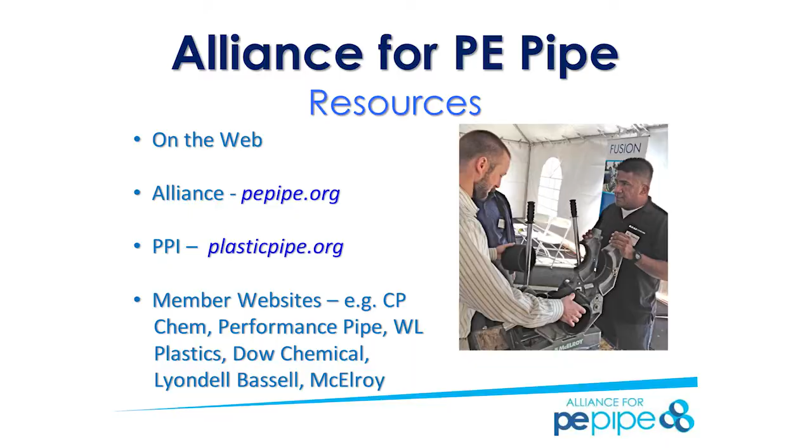Now the standards for polyethylene pipe are well established. You can rest assured that AWWA, ASTM, the CSA, and the NSF are all paying attention to polyethylene pipe.

And our products are manufactured to the specifications of those organizations. I mentioned PPI before, the Plastic Pipe Institute. They published a tremendous book, a handbook, if you will, on polyethylene. Many of the questions that I get, that I respond to, I get the answers out of that book. Now, I wouldn't exactly say it's bedtime reading, but it really is a great resource.

And oftentimes when I respond to a question, I'll include a chapter from that book, a single PDF chapter, going to the questioner for backup on our response. I'll also say you can get that book at PPI's website, plasticpipe.org. It's about $50 sent to you. Or if you send me an inquiry, I will send you a roughly 15 meg PDF of the entire book, free of charge.

So the question, why use poly? Why should I even consider it? We're pretty happy doing what we're doing. Yeah, we've got a few breaks, but why should I even consider polyethylene? Well, here are 5 really good reasons to consider using polyethylene. It doesn't leak. It doesn't corrode. It doesn't care about caustic soil. You don't really have to maintain it. And, oh, by the way, it's pretty tough, ductile, and flexible.

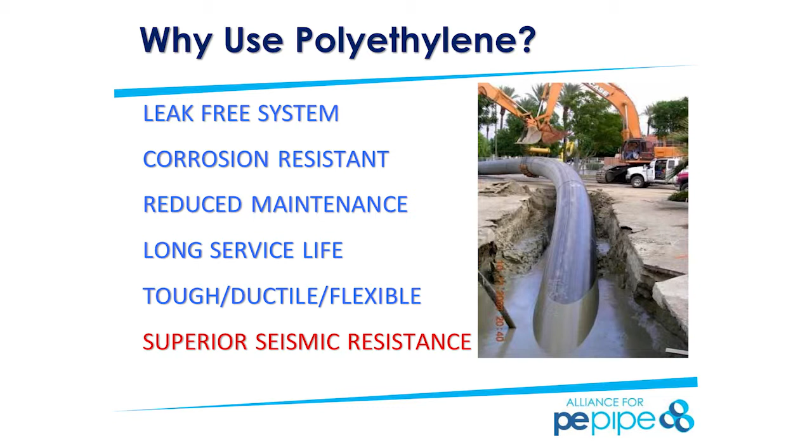But I'm going to talk about the superior seismic resistance of polyethylene pipe. Why seismic? Why, I don't have earthquakes? Well, I'll tell you, if our pipe can handle seismic issues, significant ground ruptures, it can handle whatever you can throw at it in your municipality. It can handle the freeze-thaw. It can handle soil constriction. It can handle construction methods and techniques that impact underground pipelines. If it can handle earthquakes, it can handle anything your municipality can throw at it. And now I'm going to prove that to you.

So, the Water Research Foundation. Many of you perhaps are members of the WRF, located in Denver. They have about a $6 million a year budget devoted to research of all things pipelines, not just poly. Poly is a very small part of what they do. But they did a study that was specifically done by a guy named John Eidinger and Craig Davis in California. Eidinger and Davis sent crews to the 3 largest earthquake events that occurred in the world in 2010 and 2011. And they sent them multiple times.

This is available on the web at WRF's website, waterrf.org. It's their report number 4408. You can Google that number and get it, or I can send it to you. We had nothing to do with the report. We didn't fund it, nor did we participate in the research. So Eidinger and Davis sent crews to Christchurch, New Zealand, Concepcion, Chile, as well as Sendai, Japan, on multiple occasions, and learned a lot of things.

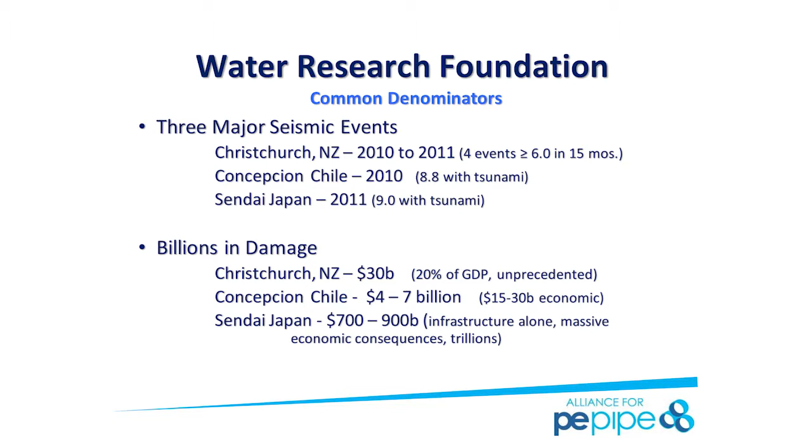There were several common denominators of all 3 of these earthquakes, other than they killed a lot of people. There was a lot of monetary damage, significant impacts to economies as a result of these earthquakes. In Christchurch, New Zealand's case, there's a $30 billion hit to their economy. Concepcion, Chile, up to $7 billion. And then, of course, in Japan, which most of us are familiar with, it was up to $1 trillion in damage in that country alone. In the case of Christchurch, 185 people died, 525 died in Chile, and over 15,000 died in Japan.

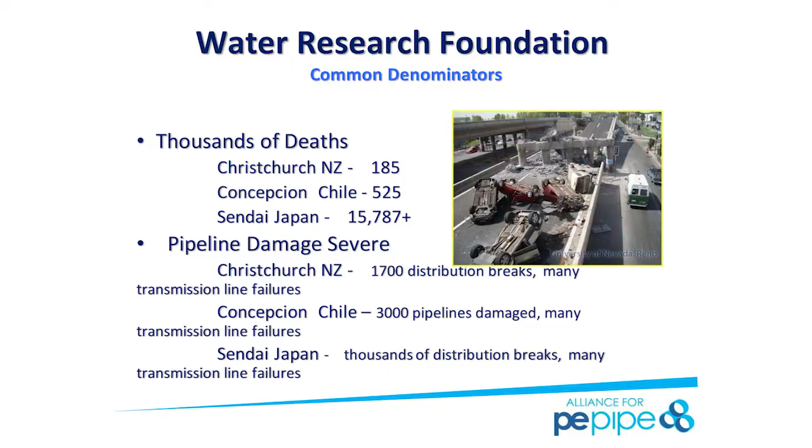The number of breaks on the screen is significant in each of those 3 locations, on the water and the sewer side. And even with these thousands of deaths and billions in damage and the severe pipe damage throughout all these locations, guess what? No reported polyethylene failures in water, sewer, or gas. That's in the report. No failures of polyethylene. If polyethylene can handle the 3 biggest earthquakes in 2010 and 2011, it can handle whatever's going to go on underground in your community. You should give polyethylene a try.

So specifically, the Tohoku quake in Japan, what happened there? Well, it was a 9.0 earthquake with an ensuing tsunami. The shaking lasted up to 5 minutes in some locations.

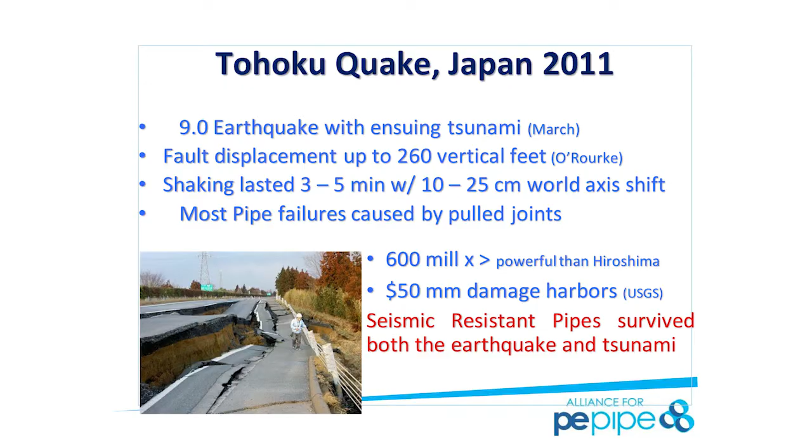And most of the failures were caused by pulled joints. The phrase that struck me when I read this report was seismically resistant. Eidinger and Davis said polyethylene pipe is a seismically resistant pipe. They recommended people seriously consider polyethylene pipe as a result.

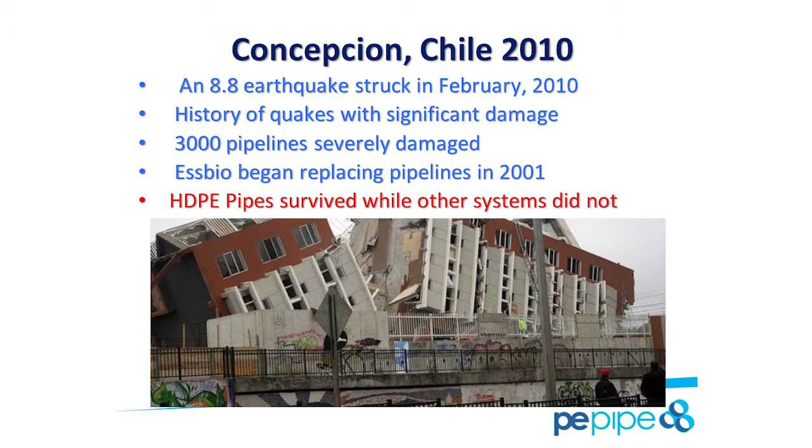We all know how much time and energy we spend fixing broken bell and spigot systems. Why, when there's something better that's available? In the case of Concepcion, the thing that I find fascinating here is we have Essbio, a private for-profit water company that came in prior to an earthquake in 2001 and started making all the fixes with polyethylene. All those fixes that they made in that 2001 quake survived beautifully in the 2010 quake.

No reported failures. So now we have Essbio, a private for-profit water company, saying, hey, not only did polyethylene survive in 2010, all those pipes, the 10 years' worth of pipes that we put in as part of our capital program also survived. That's exciting. And that's proof. That's objective data that says polyethylene pipe can handle seismic issues well, without failure.

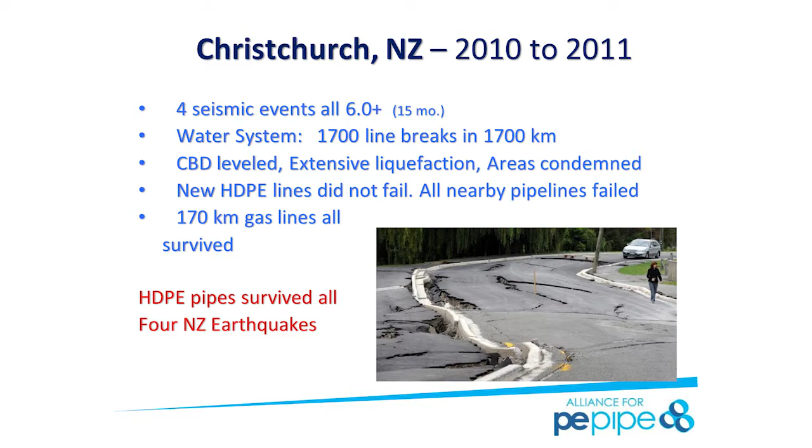Without failure. So in Christchurch, four 6.0 earthquakes and greater over a 15-month period in one municipality. Four of them. The one in Napa in August of 2014 was a 6.0. Imagine that four times over 15 months. So they had over 1,700 line breaks. After the first earthquake, the mayor of New Zealand called up Dr. Tom O'Rourke at Cornell, and said, hey, we had a bunch of breaks, what should we do?

O'Rourke said, have you considered polyethylene? And the mayor said, nah, we use it for gas, but we don't use it for sewer and water. A familiar refrain in the United States, to be sure. So O'Rourke said, please consider it for water. Take a 1.5 mile section, fix it with polyethylene and see how you like it. Try it in the water side.

So the mayor did. Little did the mayor know, earthquakes 2, 3, and 4 were going to come along, and that 1.5 mile test section did just fine. No breaks, no damage to it or the gas that was already in the ground. So the mayor of Christchurch, New Zealand was sold on polyethylene pipe. All the fixes after 2, 3, and 4 were done with PE pipe.

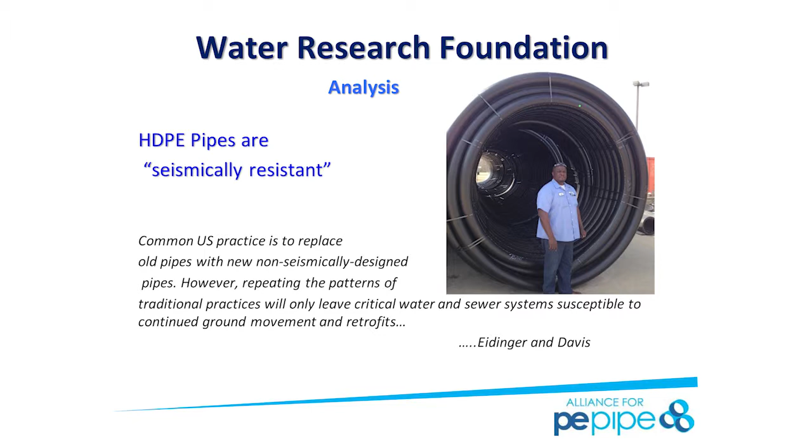So, seismically resistant is now in the lexicon of the engineering community in the United States. Or if I have anything to say about it, it will be. But it's an important phrase. And if we can take a 500-foot section of 6-inch polyethylene pipe and roll it up like that image you see on the screen, it can handle an earthquake event. It can handle what you can throw at it in your municipality. So freeze-thaw, no problem. Don't worry about breaks in the middle of the night.

Let's take a look at Thomas O'Rourke at Cornell. Why did the mayor of New Zealand call him after that big event in 2010? Well, O'Rourke had done a study in 2007, which he called his buried pipeline study, that basically was a ground rupture study of the effects on underground pipelines of a simulated earthquake event. You can find his information on his website at the university.

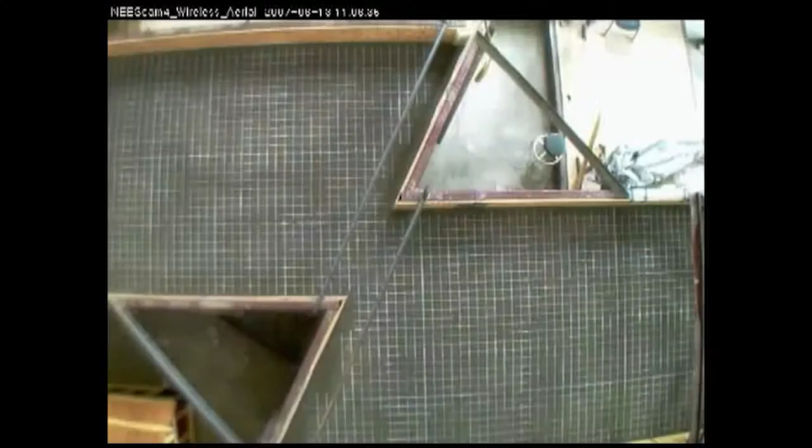So what he did is he took a 50-foot trench box, filled it full of dirt, and put a 35-foot stick of polyethylene pipe in there. Now that was a 16-inch diameter DR11 pipe. This video is the top view of what occurred with O'Rourke's study. That 4-foot shift, that lateral shift of the polyethylene pipe. Not only did he take a video of the top-down view, he also stuck a camera in the middle of that pipe so we can see what happens. Let's take a look.

That's what it looks like inside a 16-inch DR11, so pretty thick wall, stick of polyethylene pipe. Pretty impressive. So as O'Rourke says, the experimental evidence confirms HDPE pipelines accommodate severe deformation associated with earthquake-induced ground rupture. That's right out of the Cornell report.

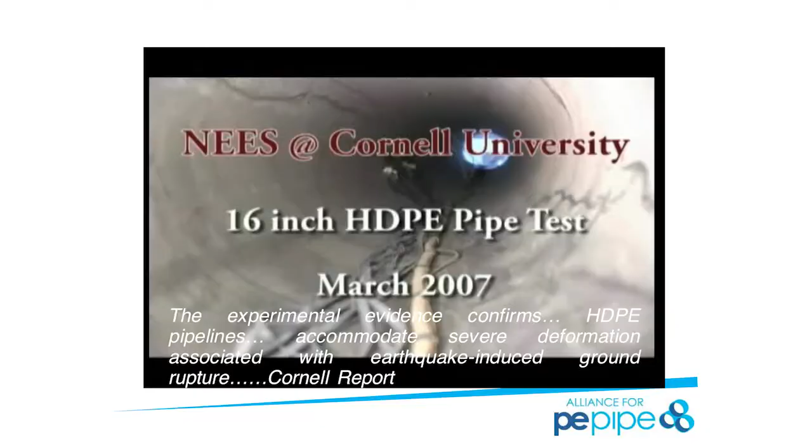So that means the two male ends of polyethylene pipe fused together can handle significant ground deformation. That means fused PE pipe can handle freeze-thaw in Grand Rapids, in Chicago, soil contraction in Houston, and earthquake events in Seattle, Los Angeles, and Napa, California. So why not use a pipe that doesn't break?

So the cost of water, it's very expensive. You do a lot to deliver water to your customers. Why should it leak? Polyethylene doesn't leak. We respect the value of water with polyethylene. We think you should too.

So today, I have the pleasure of introducing Richard Kolassa. Richard is the technical director of WL Plastics. He's an expert in all things poly. So he will share with us the features and benefits of polyethylene pipe.

Today, I'm here to talk about high-density polyethylene and the features and benefits and how it can work in your municipal water and sewer markets. Today, I'll be talking about the corrosion resistance of polyethylene pipe, the advantages of being a leak-free system, the benefits of reduced maintenance costs for today and future generations, service life of the product itself, and understanding how it can benefit your current municipality and water systems.

I'm also going to talk about the flexibility and how tough this product really is. The reality is with polyethylene pipe, we have a product that we believe will help eliminate a lot of the issues of an aging infrastructure that is currently a big problem not only in North America, but in all parts of the world. I'll also talk about the pressure rating of a product so you understand how these products can operate and how you can design them specifically for your applications in water and sewer.

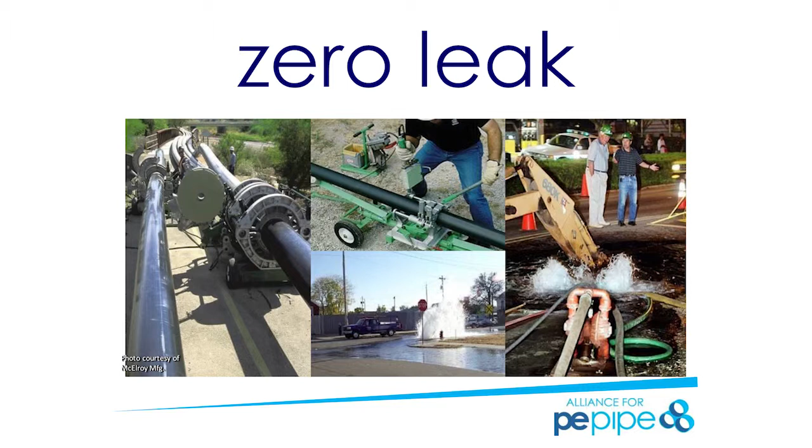I'll also talk about the leak-free system that polyethylene offers in your water and sewer applications. A zero-leak system means that the water that you're pumping into the pipeline after treating the system to very strict regulations and conditions is not going to be affected by infiltration or exfiltration. The corrosion-free aspects of polyethylene mean a long service life. It does not corrode and it does not tuberculate. So your system is going to operate as it would the first day that you designed it and started it.

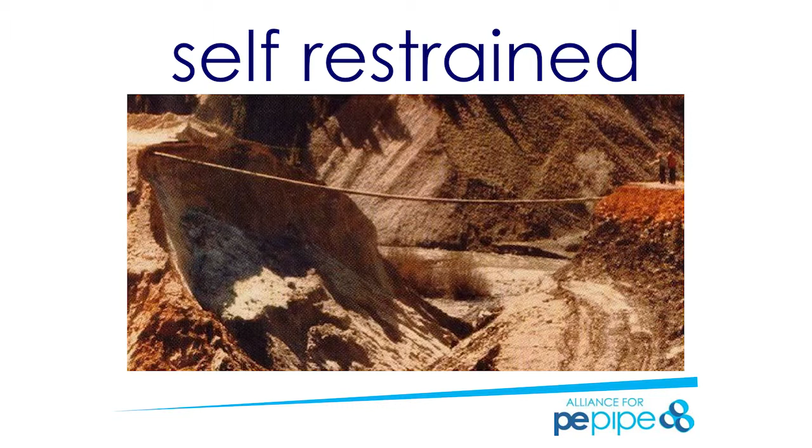It's a self-restraint product: when you fuse the product together, it holds together, and you don't have to worry about restraining the product in the ground. It will do that on its own. This particular picture shows a washout where the pipe actually held together. So your service lines are still providing, whether they're fire main or water supply, into those areas. That self-restraint system, leak-free and corrosion resistance really do mean extended life.

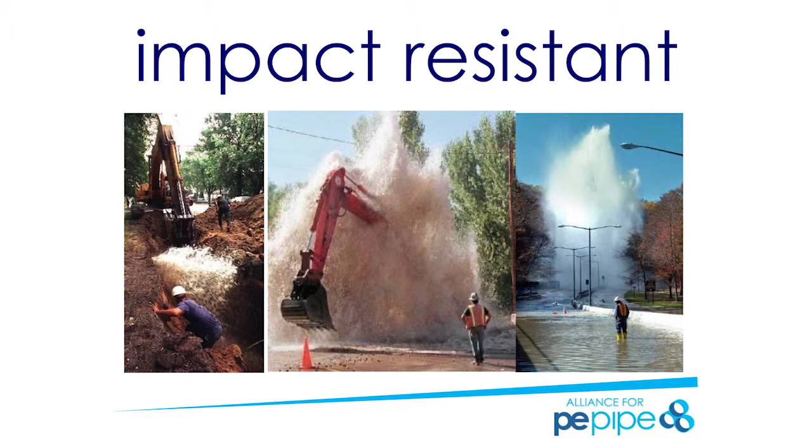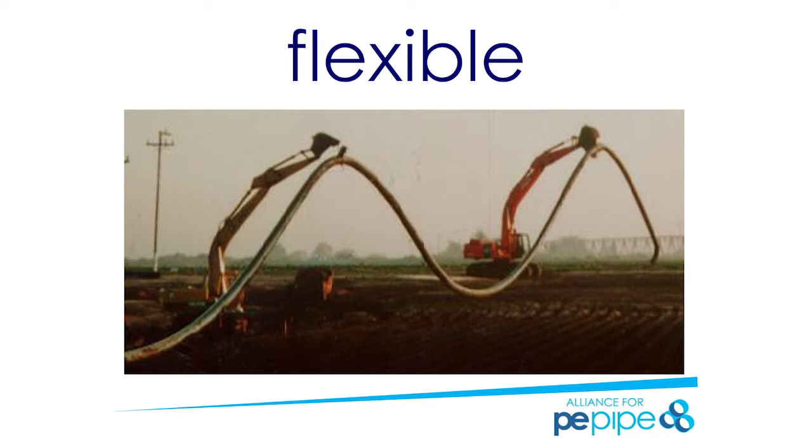It is very impact resistant. We have equipment that can damage pipe by third party, which is typically the failure mechanism for polyethylene pipe, which doesn't happen very often. But this impact resistance means it's very tough. It is also a very flexible product. Although polyethylene pipe seems a stiff product, it is ductile. And this flexibility helps you not only in installation, but gives you versatility in how you can stage and prepare to install polyethylene in your municipalities, especially in urban areas.

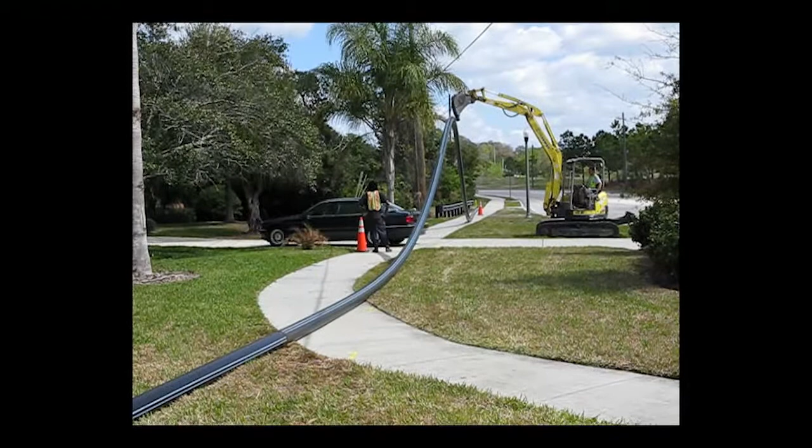As you can see in this video, polyethylene is very flexible. Apparently this gentleman didn't get the memo that we were installing pipelines today, so we had to lift the pipe so he could drive his car to attend to his daily business.

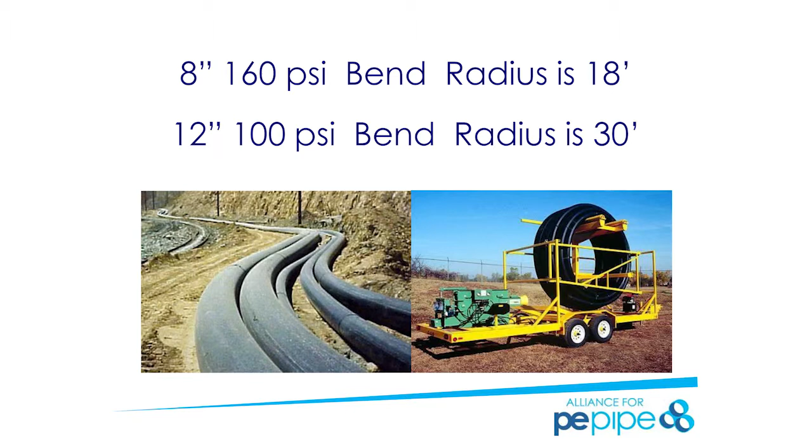The flexibility also is very well understood in the polyethylene industry. We understand that for various products we have minimum bend radiuses that we need to follow. In some cases, the installations will not require fittings to change the direction of the pipe. In this picture you can see it's actually bending and following the contours of the land, which helps reduce the installation times and gives you flexibility, no pun intended, to install quicker and more efficiently.

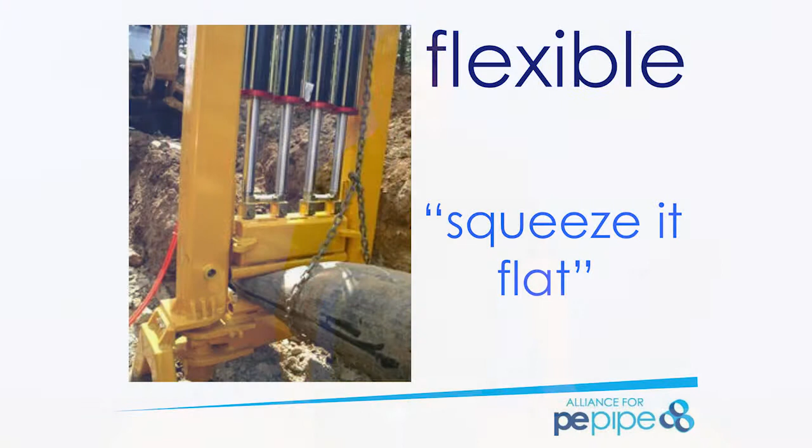The flexibility also applies to your maintenance and installations. This squeeze-off tool, because of the ductility of polyethylene, allows you to cut off the water sources so that you can utilize the fusibility of the product. That fusibility, maintaining a leak-free system, also adds to a monolithic system, which again adds to that leak-free confidence. This picture also depicts the squeeze-off of polyethylene. Again, this is a controlled procedure used in maintenance or in tapping into systems to allow for a contamination-free fusion of that system.

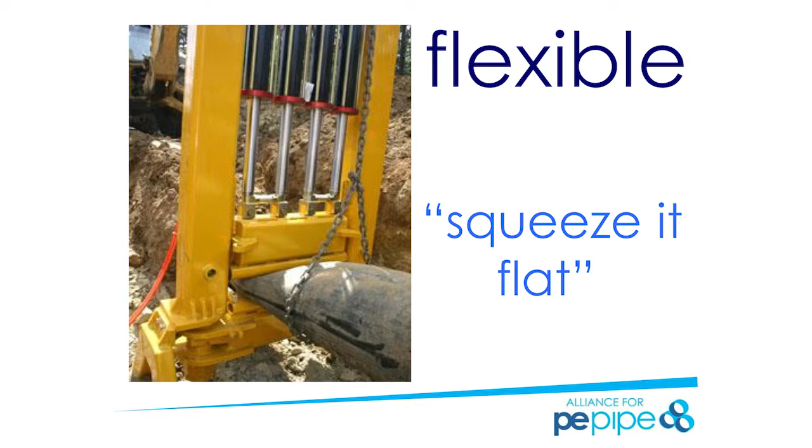Again, creating a leak-free environment for that pipe. The pipe is flexible enough that it can be squeezed down to cut off the water source so you're able to fuse to maintain that monolithic system, but it'll also go back to its original shape as long as yield points are not exceeded. And these procedures have been studied and tested to ensure your system maintains leak-free and it maintains the ability of the product to perform as expected.

Another feature of high-density polyethylene pipe is understanding the flow rate of polyethylene, especially water systems and sewer systems, and how that's designed into your flow characteristics and needs for that product and that pipeline system. The Hazen-Williams factor is a factor that is used for all different types of piping systems. For polyethylene, the value is 150. And this is really a benefit because it's one of the highest flow factors of all piping systems in the industry. And this accounts for how you properly design and ensure that you're providing the proper water flow to the communities that you're servicing.

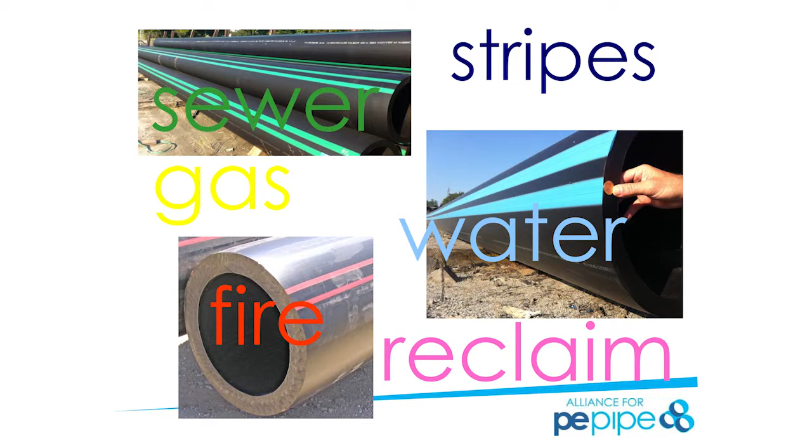Polyethylene can be identified in many different ways. First of all, print lines will identify what that product is for. However, as a quick reference on the beginning of an excavation, striping can be put on the pipe to identify water lines, gas lines, which is typically your yellow color, and your reclaim lines, which could be green or purple in some cases. There's also FM, which is Factory Mutual for fire prevention systems, that is identified by red.

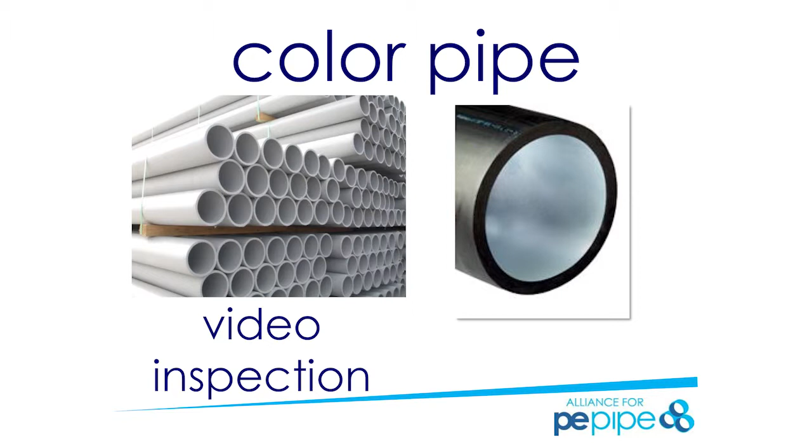Another feature and benefit of polyethylene pipe is it can be colored to many different types of colors. However, these colors are controlled in terms of the formulation, but to meet the needs, for example, for video inspection, we can lighten the color, whether it's the inside surface or the total pipe wall, to ensure that we have good, accurate video inspection of your pipeline system or your existing pipeline or installed pipeline system.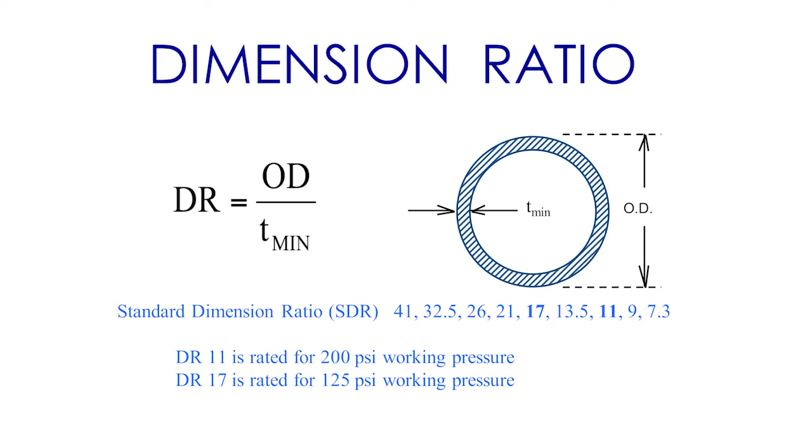Polyethylene pipe is designed by dimension ratio. Dimension ratio is a formula that is the outside diameter of the pipe divided by the thickness of the product. What does this mean? Well, for polyethylene pipe, we have various dimension ratios for varying pressure needs. These pressure needs are really important in the design of your pipeline system. If your operating system is based on 100 psi for the lifetime of that system, then you want to design that pipeline system based on the proper DR.

Why is that a feature and benefit? The fact is, we sell polyethylene pipe by the pound. We also purchase the polyethylene raw materials by the pound. And this will add cost benefit to you if you use and utilize the proper design factor. If you put in a heavier wall pipe for a lesser designed system, you're over-engineering that system. And that over-engineering will only cost you money. So we encourage you to understand the DR because it will help you properly design.

So with the understanding of dimension ratio for polyethylene pipe, we also have to understand how did that become where it is today. Well, what's changed is the resin itself, the materials and the products that we use to produce polyethylene pipe. We've moved from a PE 3408 material, which is a cell classification of the older generations of resins, to now PE 4710. So what does that mean to us? And what does that mean to you?

Well, for us, that means we can produce a thinner wall pipe and maintain the same type of pressure, which actually is a reduced cost benefit to you as the user of that polyethylene pipe system. In this particular slide, you can see the DRs and the comparisons between the pressures, which gives you that advantage. PE 3408 materials are no longer available for us to produce into polyethylene pipe, so you set your specifications and your designs around the PE 4710s.

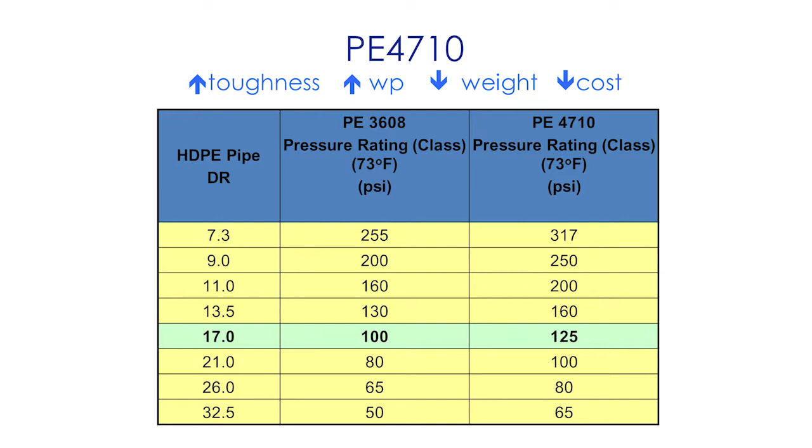Other features and benefits of polyethylene pipe are really the corrosion and the tuberculation of those products. Polyethylene pipe does not support any biological growth for the lifetime of that pipe. As you can see in this slide, steel pipe will corrode, it will build up biological aspects which causes problems within your piping system. Tuberculation narrows the ID of that flow channel, plus you're taking a very well treated water and pumping it into this dirty system.

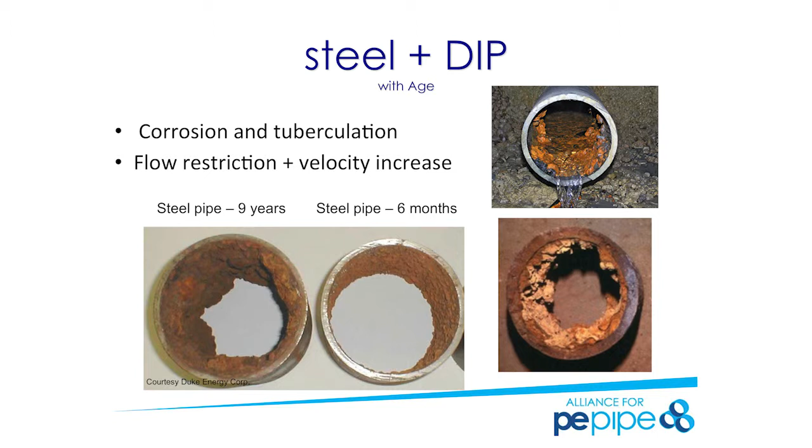Polyethylene resists that type of growth, and the flow velocities and flowability of the water inside that pipeline system will not change. This is very advantageous for the longevity of the product. If we end up corroding and plugging up the systems, it's going to affect how your maintenance and how your pumping systems will work. As you can see in this slide, we exhumed pipe that was over 41 years old.

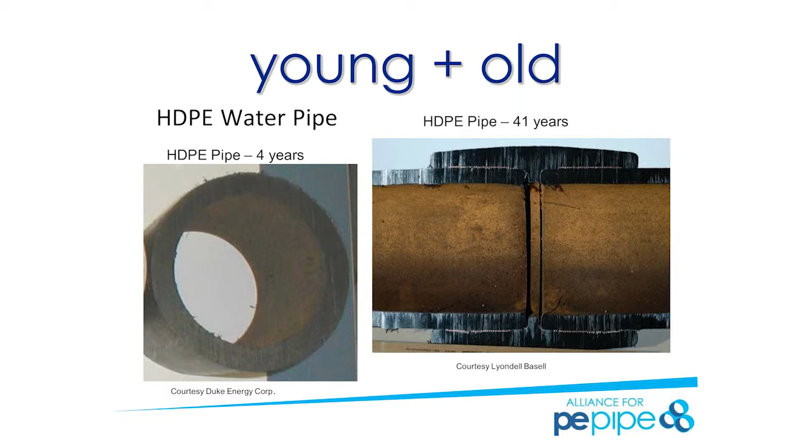And that 41-year-old system was as good as the day we put it in. We put it through all the rigors of testing, and it actually fell into the same cell classification as the day we put it in. This tells you that you have an advantage. It can't be impeded by roots. It can't be jeopardized by ground movement. So your system is intact.

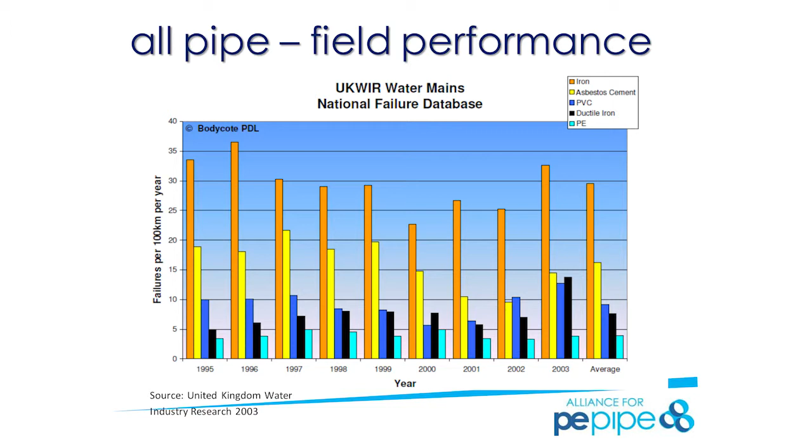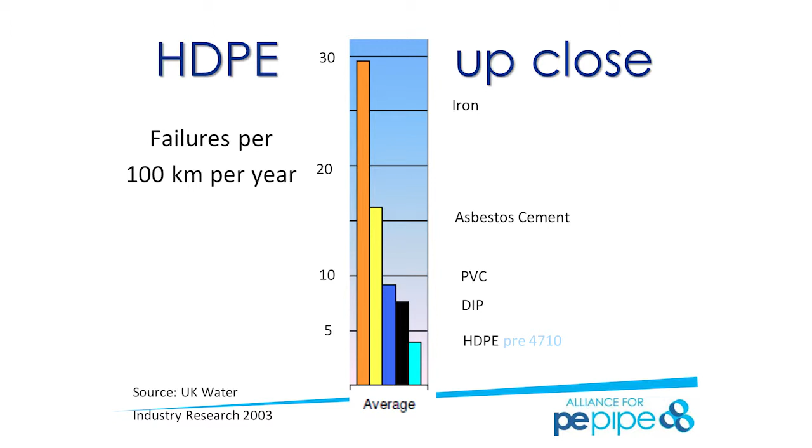In addition to not corroding, not affecting the flow velocities of the product inside the pipe, high-density polyethylene has a track record of being the lowest failure type product in the market. There's a UK study done that shows that polyethylene literally had the lowest failure rate of all products in water and sewer applications. A close-up look at this shows that the various products such as ductile iron and PVC have higher failure rates than polyethylene. This is a benefit to you because you don't have to spend time maintaining and spending money on constant repairs.

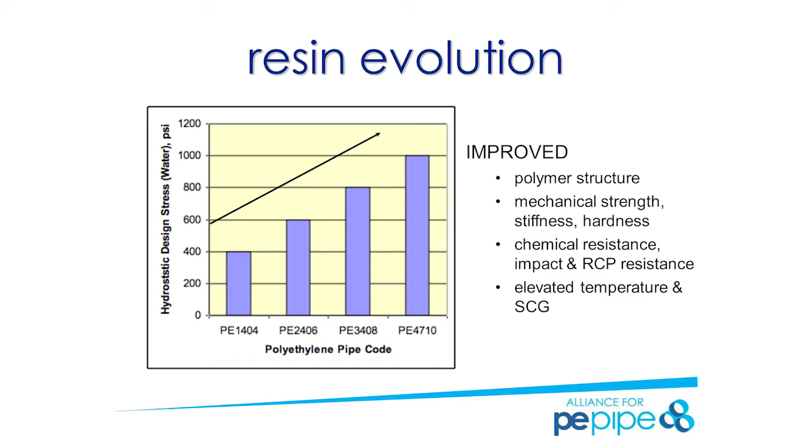Another feature and benefit that we need to understand, as I mentioned before, is the resin evolution of polyethylene has definitely improved. This works to our advantage, that we have higher pressures, stronger products, but really understanding these changes means that you have to make changes as well to your specifications. Because if you don't keep up with the current products, then the accuracy of your specification may be in jeopardy.

Another feature and benefit of polyethylene pipe is its ability to absorb the energy of surge events. And this is really important to understand because these types of events can be catastrophic to other pipeline systems. It is defined by recurring and occasional surge. What does that mean? On an occasional system, an uncontrolled event such as a power outage turns a pump off and on. And the reality is that that water hammer is uncontrolled. So you don't know when that event is going to occur.

Polyethylene has the ability to resist 2 times the MOP, or the maximum operating pressure, for millions of cycles over the lifetime of that pipe. On a recurring system where you're actually turning the pumps off and on a controlled basis, we reduce it a little bit, however, it still has a significant 1.5 times the MOP to resist these surge events. And this is important to understand because it gives you confidence that the high-density polyethylene pipeline system will work through those uncontrollable or controllable events.

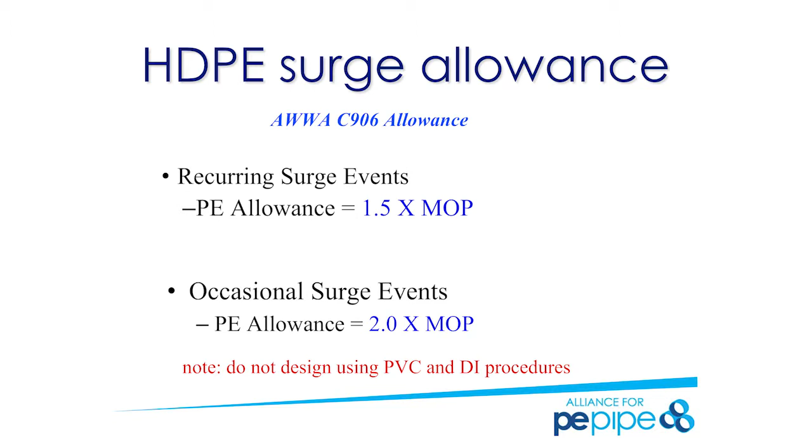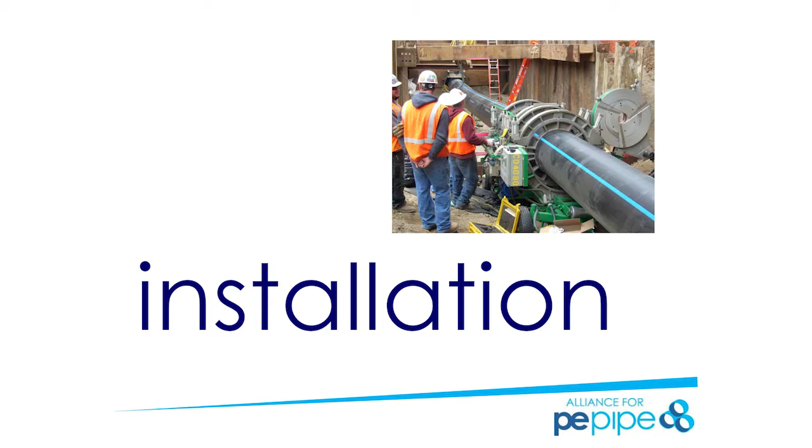The other features and benefits of polyethylene pipe are not only related to the material changes in design and the reduction of cost because of the added toughness of the products, we also have installation advantages and features and benefits.

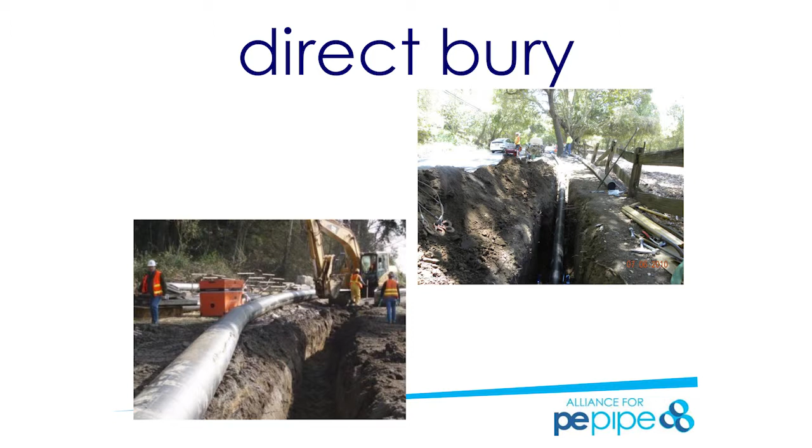And this is really important to understand because this will help save cost and time of installations, especially when we're addressing a failing infrastructure across the continent. Direct bury is one of the ways that we use to install pipeline systems. We're all aware of that. But the advantages of polyethylene pipe is we don't have to dig big, huge trenches to have people in the trenches to install and put together a bell and spigot system. You can actually build the system outside the trench and have it ready to go into the system, which saves you time. And also, it takes less energy to dig out the earth and move the earth to put that line in.

But there's one aspect of polyethylene pipe, especially when we put it in the ground, is it's hard to detect. So we have to be able to trace that product and where it is at the time of installation. Because it's a thermoplastic product, it doesn't send back a signal from ultrasound when we go to look for these lines. The reality is that we have to put tracer wires, some type of identifier that this pipeline exists there. Not only does that help us understand where it is, but if something happens on a crossing utility, we can make sure that we don't go in and cause third-party damage because we didn't have the identifier on that pipe or didn't locate it where it was supposed to be.

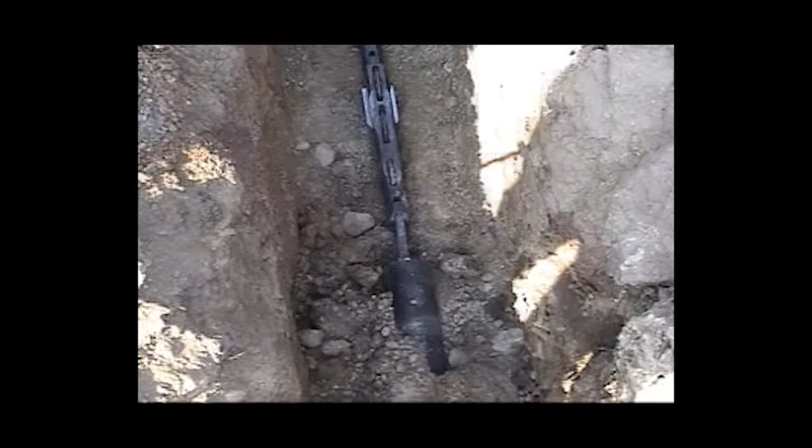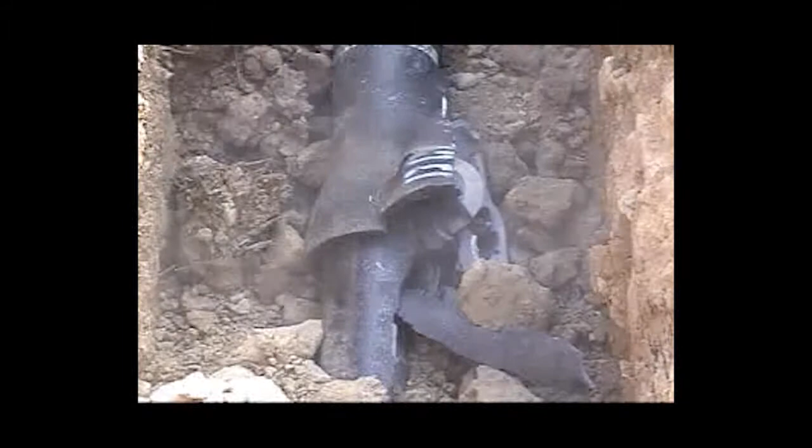Another system of installing through this video is called pipe bursting. And what you're seeing here is an open excavation, which is typically underground. The reality is that we can take an existing pipeline, let's say a corroded pipeline, and without digging up the infrastructure, we can actually replace it with a polyethylene line. What's the feature and benefit of polyethylene? Well, the reality is it's flexible, and it allows us to bend through two little entrance and exit pits that we can actually follow that head that crushes or bursts out that existing pipeline system. This is a huge advantage in terms of cost, because you're not digging up our roadways, because that's where we typically put our pipeline systems, and also you don't have to redesign right-of-ways, so that also saves additional time. Plus you're getting a brand new line that's associated with that operating system.

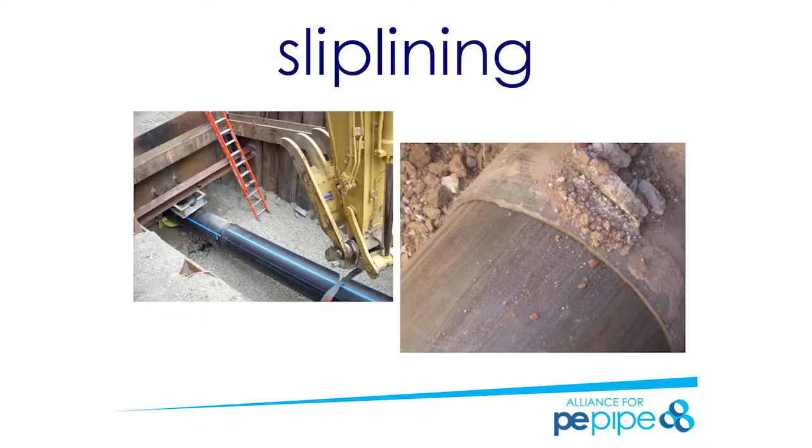Another technique that you can use with polyethylene pipe is slip lining. This is when the integrity of the existing line is still in existence. It has the integrity, but you want to just extend the lifetime of that system. And so what is called is slip lining. So the slip lining typically doesn't account for the pressure rating, because you're still relying on that host pipe to hold those pressures and aspects of the operating system.

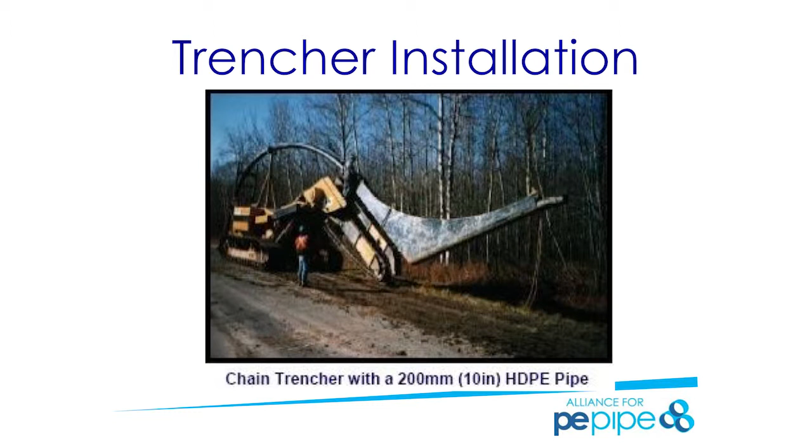Some of the advantages of trenching. This particular line is a 10-inch line where you actually drill in the same time that you're moving the pipeline. So this pipeline was fused together in a 3.5-mile section. And in that 3.5-mile section, they installed it in less than a day and a half, which is really unheard of in terms of efficiency. Please ensure with this type of system that you know where all your crossing right-of-ways are, or otherwise you're going to end up with a bad situation.

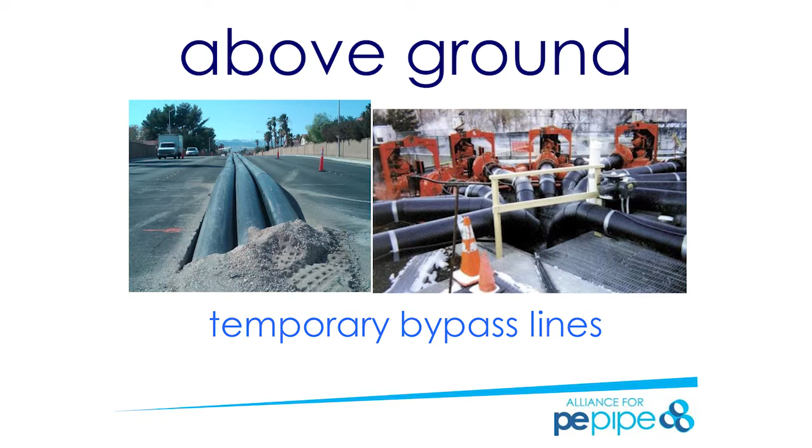You can also use polyethylene for above ground applications. Temporary systems, we have flood events that occur. This particular picture showed there was a Little League tournament that was happening in the US, and it was flooded by the river that was adjacent to the ball diamonds. So they literally installed an above ground system to pump that water out so they could continue with that event, which is significant to the economy and the benefits of that town. And plus the Little Leaguers got to play baseball. You can have temporary systems to move water, which is very, very good. And the benefit and feature is that high-density polyethylene is not affected by UV degradation. And that UV degradation does not impact the ability for it to hold pressure.

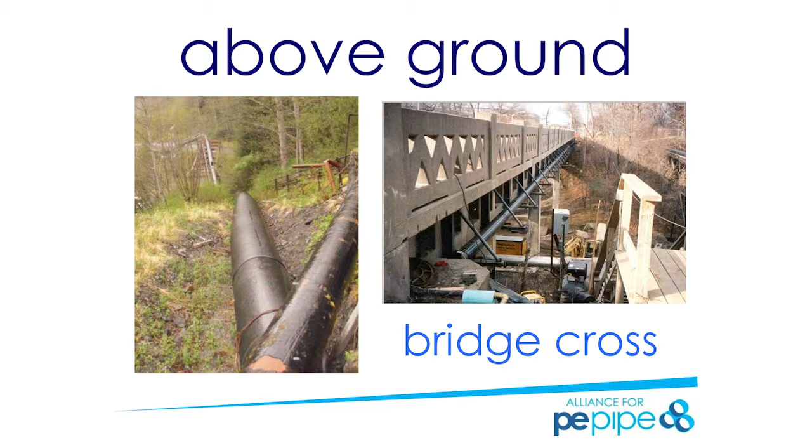There are several other above ground water installations. For example, the mining industry utilizes polyethylene pipe above ground, so it literally can move that pipe around and be flexible to the changing areas that they're excavating. Bridge crossings is another way to use an above ground application. However, you have to understand how that bridge location is going to affect expansion and contraction of that product.

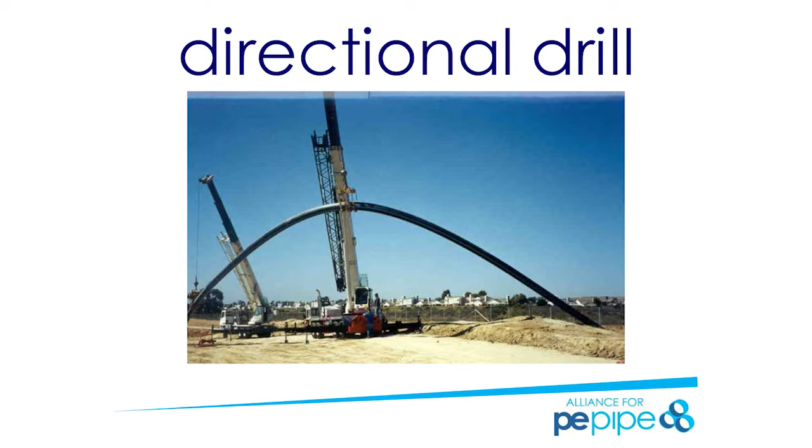Another technique that's used to install polyethylene pipe is directional drilling. Directional drilling is becoming very, very popular because not only does it protect conservation areas, but it also is very efficient in terms of time in installing very large line. In this particular picture, this is a 24-inch line that went under a roadway and under a river at the same time, which really gives a huge advantage to time and installation of moving that service forward.

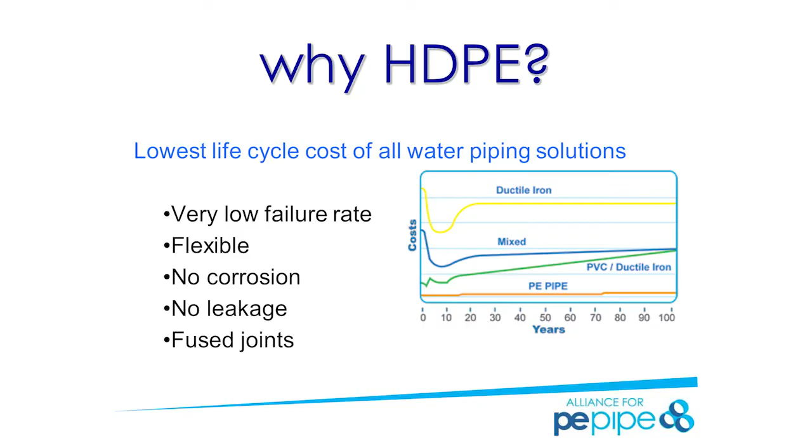So why polyethylene pipe? There are so many features and benefits, not only in the changes that have occurred with the new materials, but you have a very low failure rate. You're very flexible in how you can install, and very flexible in terms of how it operates and works. You also have no corrosion. You have no infiltration of roots or anything into that system. You also have no leakage. So then the water quality that you're taking out of your system is the same water quality delivered to those customers. You also have the fused joints, which again enhances the leak-free system and makes it a monolithic system.

In a typical potable water system, what's the impact of chlorine on high-density polyethylene pipe? Well, chlorine is a very aggressive oxidizer, and it affects not only polyethylene, it affects ductile iron, PVC, and all the different piping systems that we have in the system today. So what it does is it actually causes an event called slow crack growth, and that slow crack growth is actually a crack initiation. So it makes basically the polyethylene more brittle. So it moves it from a ductile state to a brittle state, which causes the failure to occur.

So with the new generations of polyethylene, the PE4710s, for example, we've improved the slow crack growth resistance of this product. So for example, a PE3408, which is nothing wrong with an existing system today, had a PENT value or an ESCR value, which is environmental stress cracking value, to resist or determine what that slow crack growth factor is. And 3408s, those numbers were typically 10 to 20 hours of resistance of PENT.